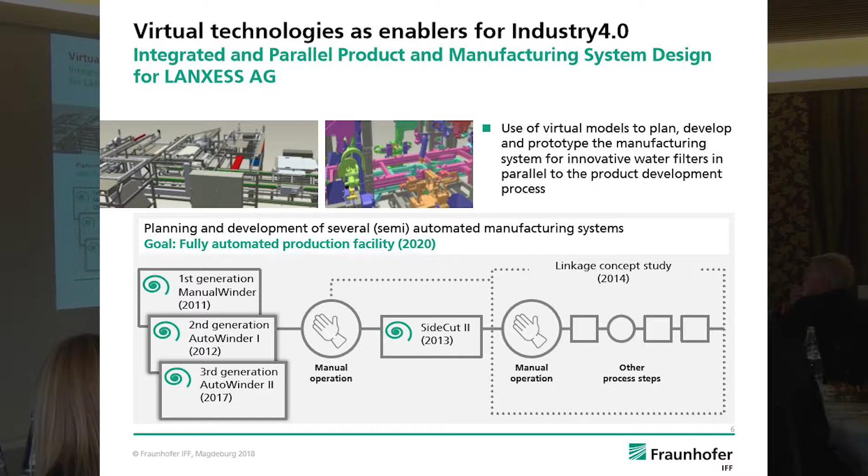So they came to us and said, look guys, we don't have any product yet, but we need the machine to build the product as fast as possible so that we can go on the market with the product as fast as possible. So can you build the machine for us that builds basically our product that we don't know all the properties of?

And we promised them, yes, we can do that using a fully virtual system, a fully virtual development process in describing what the system looks like, what it is supposed to do, and basically build a virtual prototype of the machine. And every time the company was one step further with their product development process, we incorporated the data that they just produced and augmented our model with the new data that we had, so that we had a parallel development of the product and the machine building the product for the company.

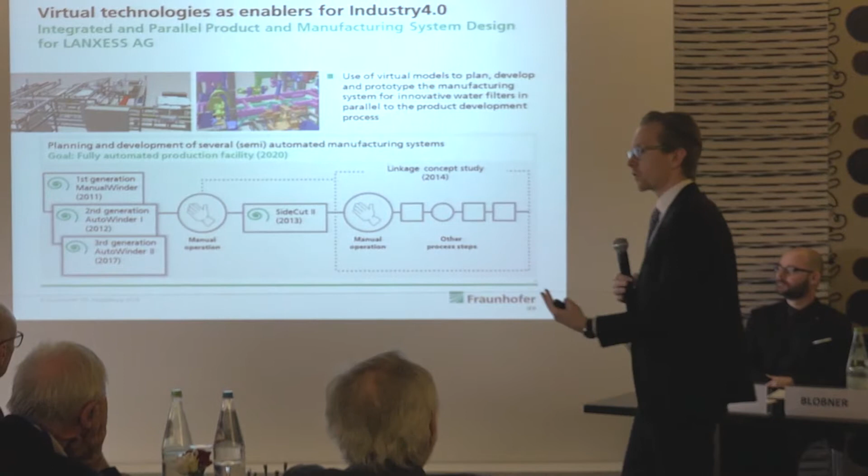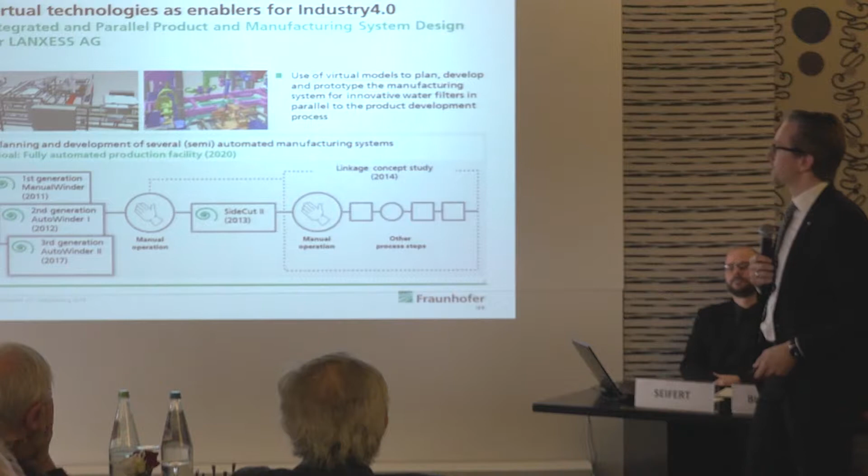So, and you can see here, our first project in this respect was already in 2011. So this was when the discussion about Industry 4.0 basically was just starting in Germany. We were already producing machines that were basically Industry 4.0 ready. And just last year, we built the third generation of this machine for the company. So it's a very successful collaboration with Lanxess and an ongoing collaboration.

So, and what this development process allowed us to do is basically build a machine that is Industry 4.0, and we developed a digital twin, a virtual twin of the machine through also incorporating very specific sensors and actuators and electric drives into the system that can consistently feed data from the actual production system back into the virtual system, so that we can use the virtual system, for example, for simulating production runs, for simulating lead times, and also in maintenance, for example, do predictive maintenance on the machine, and also providing assistance systems.

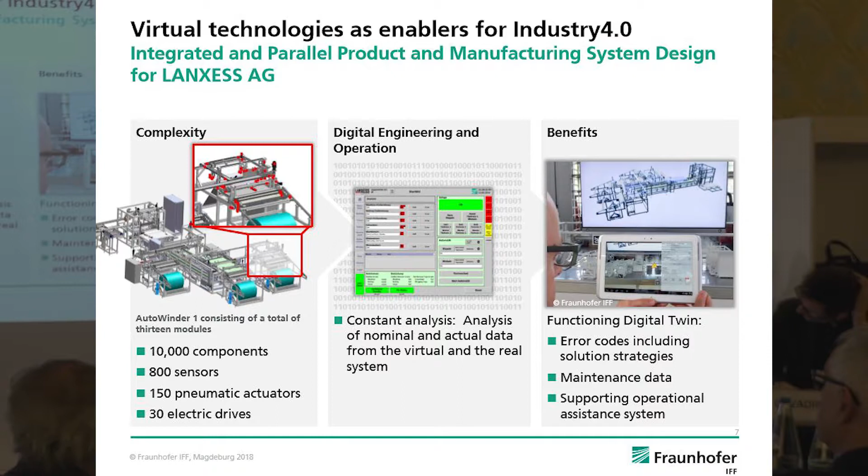You can see something like this here, assistance systems for the operators of the machine where they have all the necessary data from the machines to work on the machine, like for example on servicing and maintenance.

So this example was something where we built basically a machine from scratch and had all the degrees of freedom to develop this machine. But here, for example, is another project that we did with a company that had a manual work process just before an automated work process. So here the operator had to build a set of tools onto a platform, and this then was further worked on by an automated system.

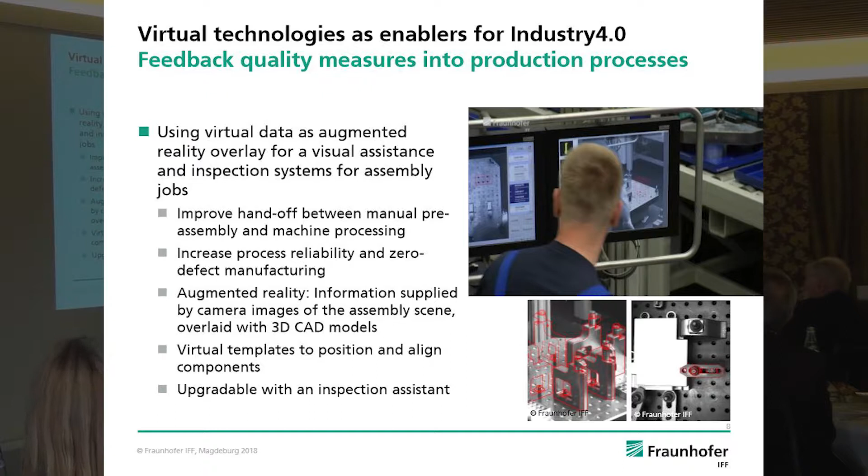So here we provided the company with an augmented reality system that basically had cameras on top of the workplace, which provided a live feed onto a monitor for the operator, and then we used the CAD designs from the original planning and provided an augmented reality overlay for the operator. And this helped the company to really cut down on the process time, on the process costs.

It especially also provided increased process reliability towards zero defect manufacturing, because in the old times the operator basically had a sheet of paper next to him, and he had to flip through the paper and see how to assemble these parts on the platform. And of course he had to imagine a 2D printout in a 3D environment, and mistakes were made. The process was not zero defect reliable, and this solution really helped the company to improve these processes. So here we used established processes and still used available digital data to improve the processes.

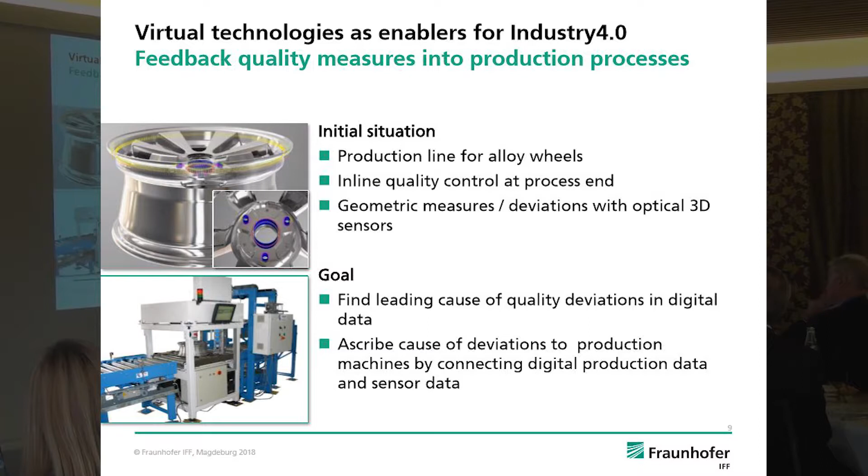Another thing that we also did on an existing process is here for a company which built wheels or rims for cars, and they had a problem that with the degradation of the drill during the process, the holes that they were drilling became uneven. So they asked us if we could find a solution to basically do a predictive maintenance, a predictive production planning on their system, so that they had a consistent quality in their process.

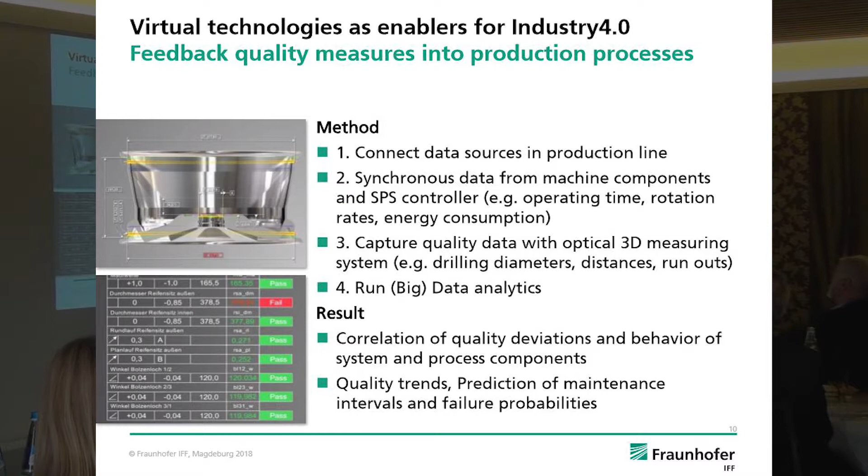So we had to find a way to bring together the process data with the quality data and do a predictive production planning for them, so that they can really improve or ensure the consistency of quality of product throughout the production run. So by, for example, slowing down the drill to improve the degradation, and so on. So here we also incorporated existing systems, used some new sensor systems, especially also big data analytics to really understand how the process is working and how it's connected with the quality.

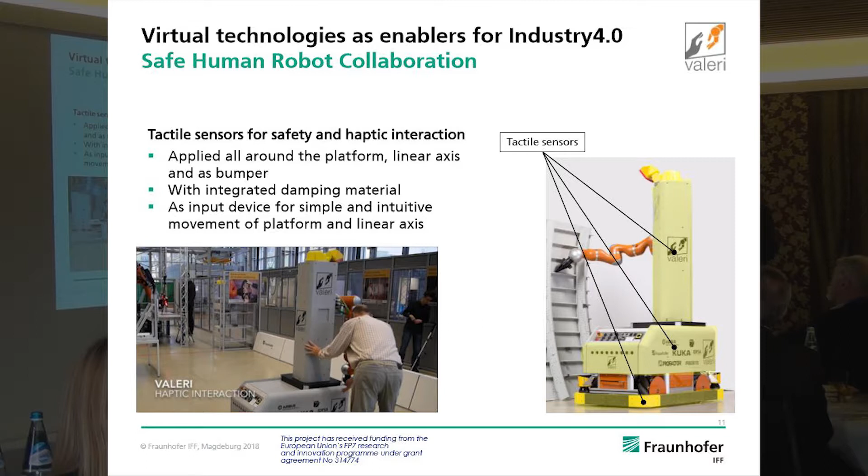I said that we also do projects in robotics and automation, and one of our main focuses here is really the safe human-robot collaboration. So really ensuring the safety of humans when they are operating with robotic assistance. So we are not talking about something like a welding robot in a car factory. This kind of robot will always be in or behind a fence, but we're talking here about automation within highly customized industries. This project here, for example, was together with KUKA and Airbus.

And the aeronautics industry is basically a lot size one production environment. And automation is nearly impossible because every time a part is different. And so if we are able to incorporate automation into aeronautics, this would be a big step. And we provided this with a mobile robotic platform here, which supported human operators in aeronautics.

We have a very strong cooperation with KUKA, but as you can see in the background, we work together with all major robotics manufacturers. You can see Fanuc and ABB robots also in the background. So there we are really working together with all the major manufacturers, but also based on the requirements of what our customers need.

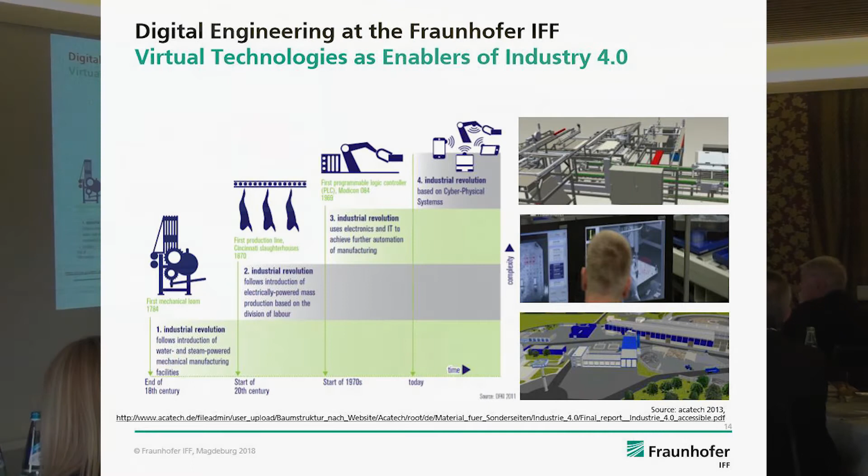And for each, we have specific projects that can show and supply references of how we can interact and better use digital data, connect digital data to increase process transparency, to increase process quality and combine it with quality, and basically make a company work better with the available resources that they have. So with this, I want to end.